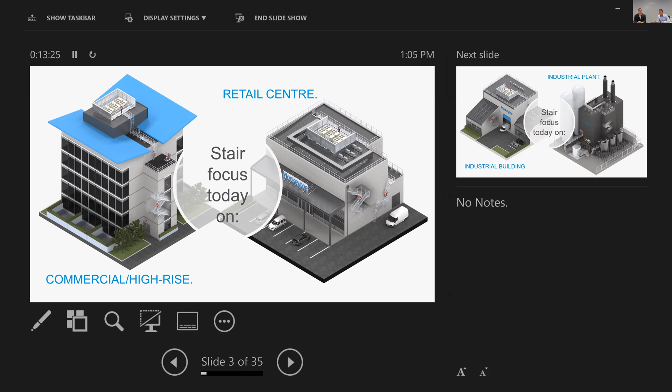So I guess the focus today around the stairs will be in particular talking about stairs in that sort of commercial, retail type space, high rise, and then also in the industrial building, industrial plant. So Monkeytoe look after the complete design and engineering process. So that obviously includes the full shop drawings and full engineering producer statements, whether that's PS1, PS3, PS4, so on, which includes the foundation designs and any related connection designs. We'll also provide the engineering design documentation associated with that.

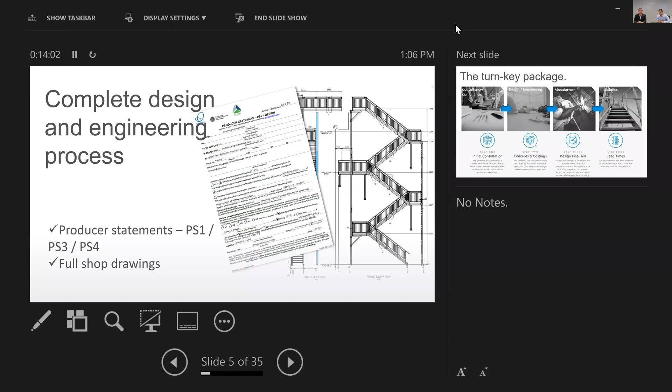Excellent. So the turnkey package, I guess what we're saying here is we look after the whole thing in-house in effect. So that consultancy compliance aspect, which I get involved in, through to design and engineering, through to manufacturing and installation, is all looked after in-house.

So just a quick step through how the whole process works. There's the initial consultation, whether that's at your office or on site. From there we can develop a costing and put together some design concepts to discuss. That moves through to developed design of the stair, and at that point we can discuss lead times and where they need to be for your particular project.

So today we're going to cover off the stair types that are outlined in the building code: accessible, common, secondary, private, and service. So the photo there shows an accessible stair. That particular stair system is at Queenstown Early Learning Centre in Auckland. Couple of points there: buildings must have one accessible stair, and they are for people with disabilities, so they need to be suitable for that application.

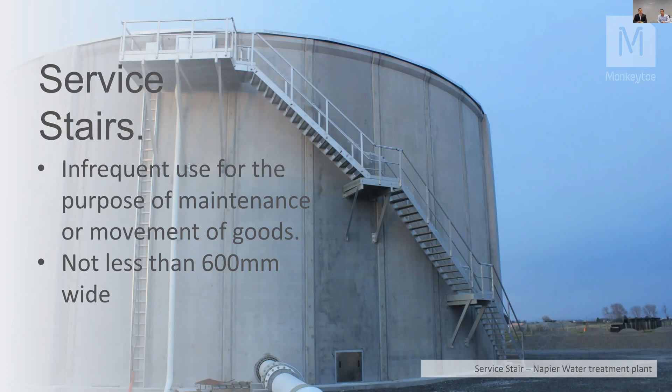Maximum pitch of 47 degrees, so obviously can be a lot steeper than any of your other stair types. The stairs shown in these pictures here are manufactured from a lightweight aluminium, which obviously reduces the load on the structure.

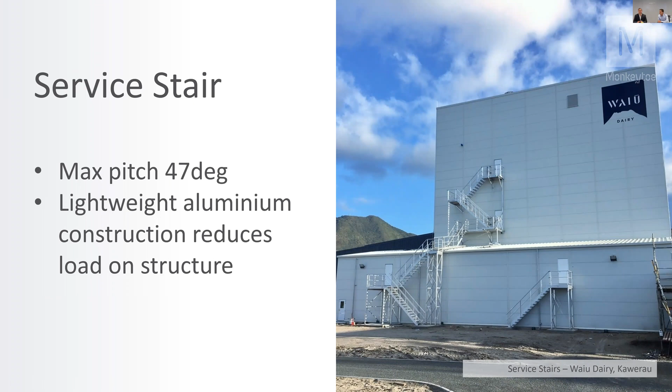So this service stair here is an example. This is located at the Maraetai Dam on the Waikato River. And this particular stair, the dam operator had looked previously at a steel stair. So they asked us to come along, visit site. We reviewed this stair and looked at some options. And I guess a couple of points I just wanted to point out here.

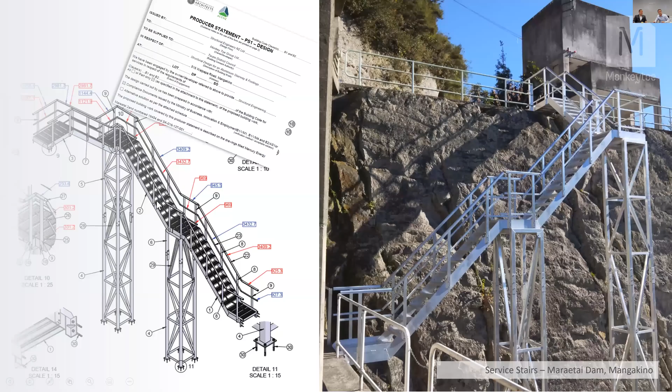Due to the aluminium construction, there are some massive weight savings, and that obviously meant that they could get away with a lot cheaper, faster and smaller crane option. So installation was a lot faster and more efficient process there. It meant also a much lighter and shallower foundation requirements. So overall cost savings also, and obviously this here included the full shop drawings and producer statements with that stair design.

So as Heinz has covered off, an engineered design, manufactured from aluminium, resulting in weight savings, cost savings, time savings, obviously resulting in a faster install, a cleaner, tidier, start to finish process.

So stiles and stepovers, these are typically designed to the service stair standard, and you commonly see these in the likes of up and over production lines, maybe over pipe work and ducting through ceiling spaces, up and over rooftops, etc. Typically used a lot in factory applications as a step over a conveyor.

So landings, I'll just cover off a couple of key points around landings, but minimum landing depth, 900mm long, and then the max flight for accessible and common stairs is 2.5 metres, or for the service and secondary stairs, 4 metres. So that 4 metres works out to be 18 rises per flight.

Balustrade systems, as shown there in aluminium. Obviously required where the areas are frequented by children under 6 years, and the requirement states an object of 100 mil must not be able to fit through the balustrade system. So they need to be positioned from 900 mil to 1000 mil above the pitch line of the stair.

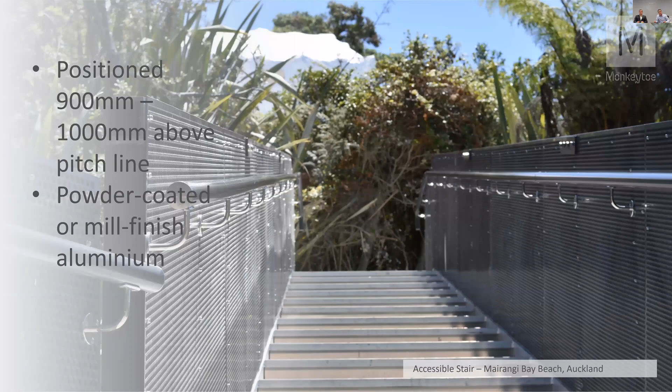Another question, attendees asking, would we normally get involved in the stair design? And another question, do we provide the full design, engineering, supply and install? So the simple answer to that is yes, we do. We are heavily involved in the design of stairs, carrying the design through to manufacture and installation. Good.

Handrail barriers. So as shown there in that picture, it's a service stair at the Palms shopping centre in Christchurch. So handrail barriers are typically used in areas for maintenance purposes. So service stairs 95% of the time would have a handrail barrier. Top rail at 1100 millimetres high.

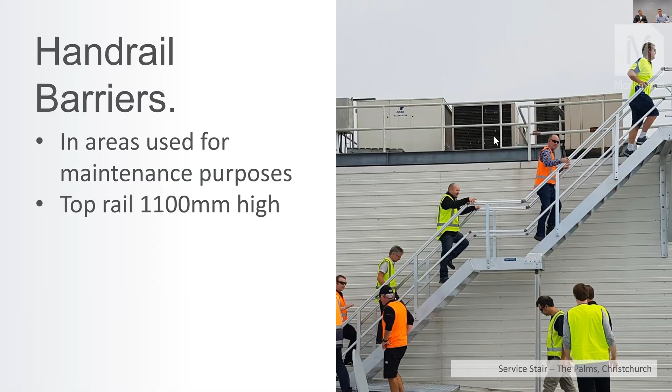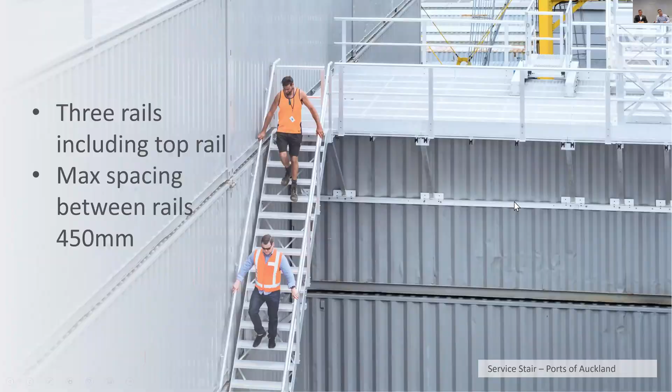So a typical barrier handrail has 3 rails, including the top rail, and it has a maximum spacing between the rails of 450 mils. The stair here is at the ports of Auckland, quite an interesting project, providing access to the computerised container lifters. Sorry, flicking through the slides here a bit quick.

So this custom stair focus, this is a Cordis hotel here in Auckland. Toby, you were probably involved in this project from the start. Thanks, Heinz. So it's on Symonds Street in Auckland Central, providing egress from the top floor. So it's 11 stories, this hotel, 26 metres tall. As you can see there, it was craned in modules, and the installation from start to finish took 4 days.

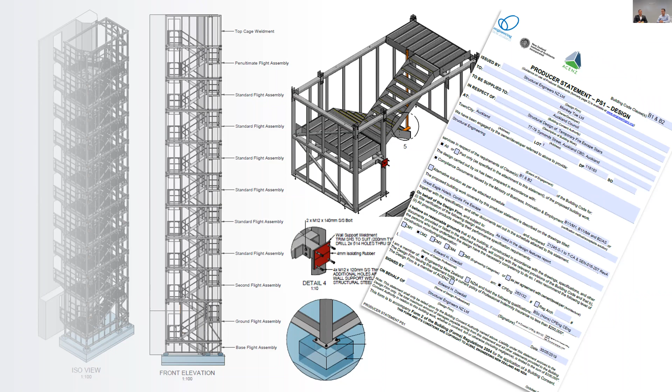So here's a bunch of things to consider when selecting stairs for access. Should we use a ladder in this situation? Should we use stairs? These are key things to consider. Frequency of access: how often is this area requiring access? Stairs are obviously suitable for carrying light loads, for example tools, toolboxes, versus a ladder that's not.

A stair is suitable for emergency evacuation, and obviously a lot less physical effort is required to climb a stair versus a ladder, which therefore means a lot safer means of access. So consider those points when weighing up whether it's a service stair, for example, or a ladder.

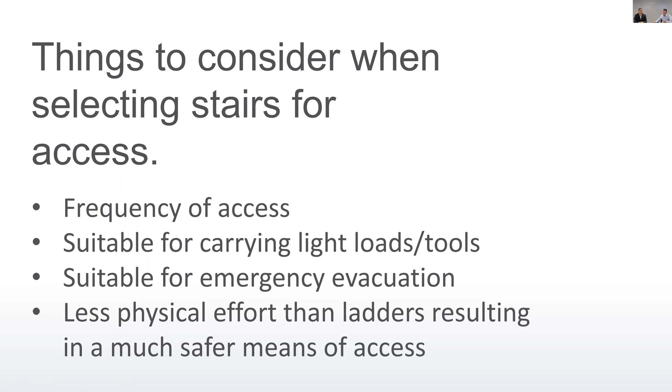Well, that ain't going to happen, all right?

Okay. Right, some other important considerations. Uniform riser height and tread depth. Uniformity there is a really key thing. You were saying before, Toby, about when we go on site, sometimes you see the odd old stair on site, and what you do find is there's a lot of disparity between the tread heights.

And our foot clearance when walking normally is around 5 to 10 mils, 10 mils max. So you can imagine if you've got a 5 mil disparity between riser heights, it's a big trip hazard.

Yeah. Often what you find, and what I've found recently at an old winery, where you're climbing from a concrete stair onto a steel stair and there's a discrepancy, you get a slight trip happening, and you measure it, 9 times out of 10 there's only a 5 mil difference. But as a human being you'll pick up that difference, and it's obviously quite dangerous.

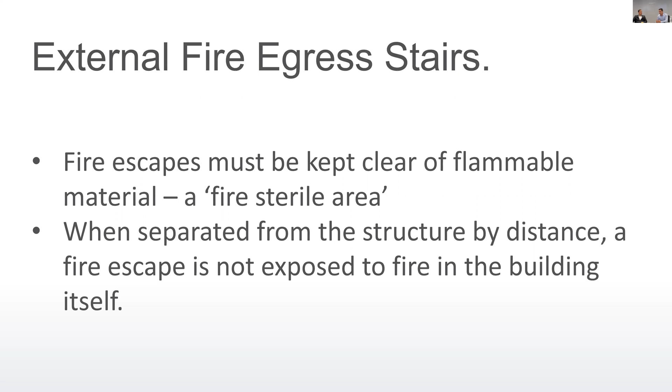The second point here, when it's separated from the building by distance, maybe a 2-metre clearance, the fire escape is therefore not exposed to any fire in the building itself. This point here, aluminium has a critical radiant flux of less than 2.2 kilowatt per metre square. So therefore, an aluminium stair does not require underside protection. It can be, and we have done it using such as a fibre cement board. But in essence, an aluminium stair does not require underside protection.

And aluminium is obviously non-combustible, and any fire escape must be of low flammability.

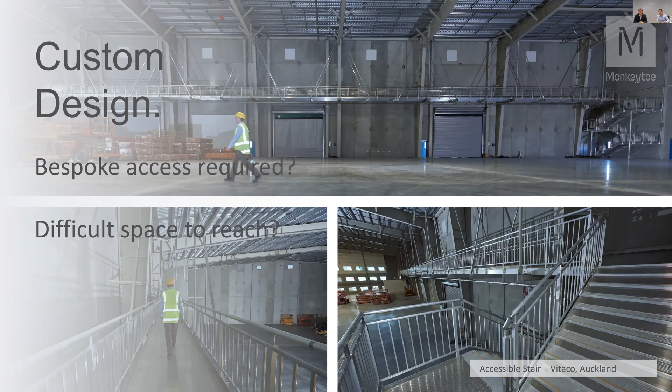And how can we assist you? Do you want to cover this one off, Hines? Yep, so obviously we look after, as we mentioned, the complete design and engineering service. Obviously full shop drawings, producer statements, etc. for council consent. We can also get involved in concept design, so put forward some concepts and work with you to come up with an acceptable solution for your project.

And whether that's visiting your office, meeting you on site, happy to do so. And also just working through different value engineering options, and whether that's a weight saving and not needing to load so much weight off the existing building structure, or savings in cost due to the lightweight structure.

There's a question there about the size of a project, is there a minimum size project? No, we're happy to look at any project, regardless of the size. I think one of our directors often uses the term small apples are sweet, so happy to taste the small apples and also happy to look at the big ones. Thanks, Owen. Good question.

So we've got a bunch of questions here we'll just fire through, and happy to take more, so keep sending them through, thanks. Do you want to answer this first one here, Toby, about the compliancy? Yeah, I think I may have covered that off earlier in regards to stair compliance, AS 1428, AS 1657. So a little bit dependent on what type of stair we're working on, it will comply with the relevant codes and the relevant standards. Absolutely.